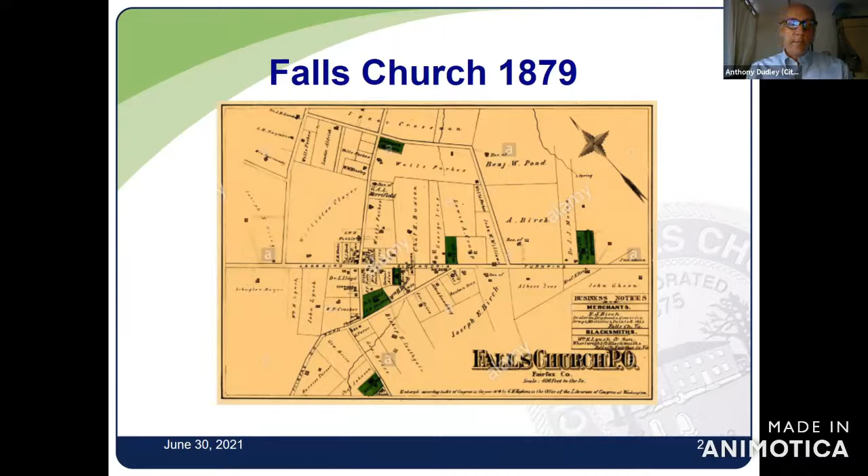As many of you know, I'm pretty new to the city, but I've started to learn a lot about the city, and I'm sure there's lots more. But what I want to talk about tonight is just a little bit of history, and really the main goal is to talk about our 6 priority projects, along with some of our water quality projects. As you guys know, Falls Church has been busy since its inception. The place was run over by a civil war. It developed pretty early in life. In the 1800s, it was a bustling area, and it's continued to be that way.

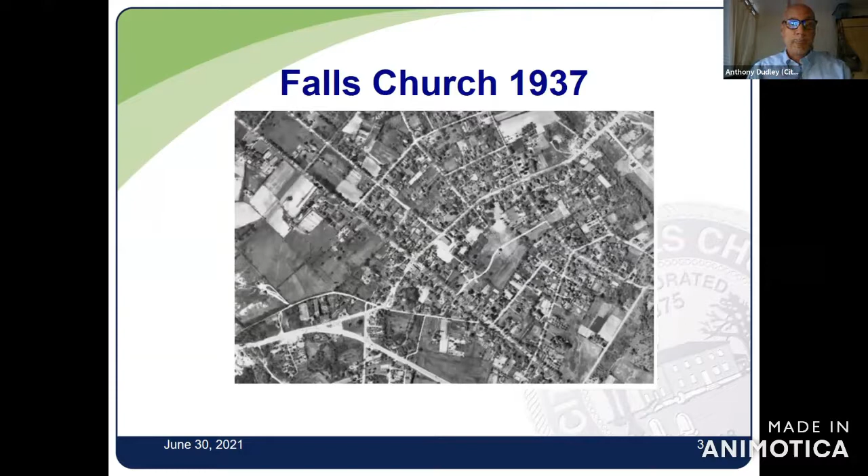This is Falls Church in 1937. You can see the heavy urban development that occurred, and we've come to have to deal with that in this time that we're in now. This is just a short diagram of the map of Falls Church along with the city boundary. It's that purple line there in the middle, divides Four Mile Run from Tripps Run.

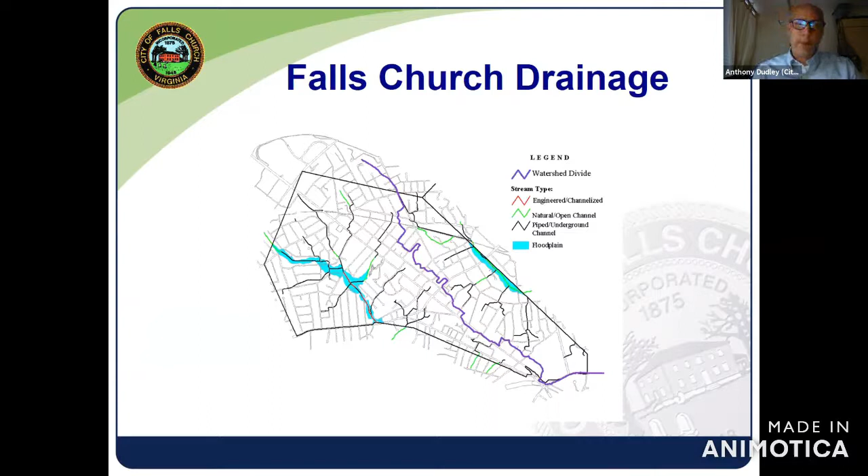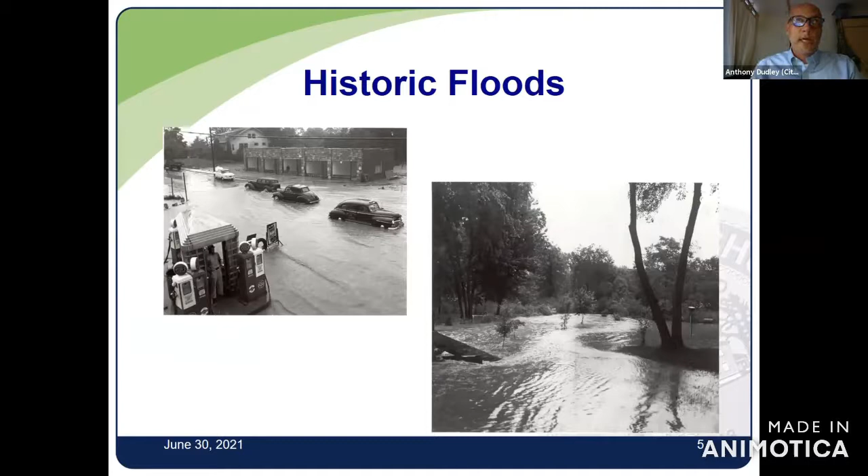What you see in the black are pipes. We have a lot of pipes in the city, and only a few channels. We had historic floods in the past, and this got people moving in the 50s to improve the storm drainage. So the response pretty much to that was to put in a lot of underground piping. As far as stormwater, we can pat ourselves on the backs that we didn't follow communities like Alexandria or Washington, DC with combined sewer.

As old as the city is, it would not have surprised anyone if that would have been the case, but they didn't. It was a separate sewer system, or at least it over time developed into a separate stormwater sewer system. So this is what we did back from 56 to 80. And you see the type of pipe that we have there. That's what they call corrugated metal pipe. It was very popular in this time frame to put in. It was cheap to manufacture, to deliver, and to install.

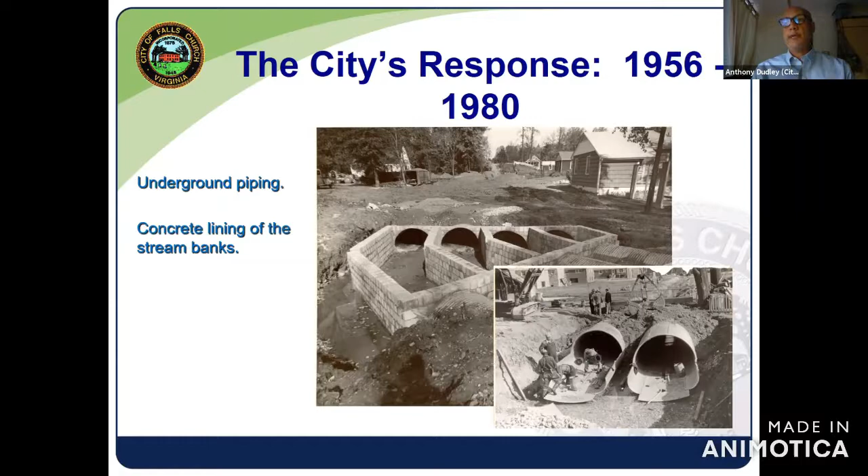But the problems that we garner from that is this. You can see we have a lot of corrugated metal pipe that has the bottom eaten out of, as the picture on the left shows. We have maintenance issues that we have to deal with, as the picture on the right shows.

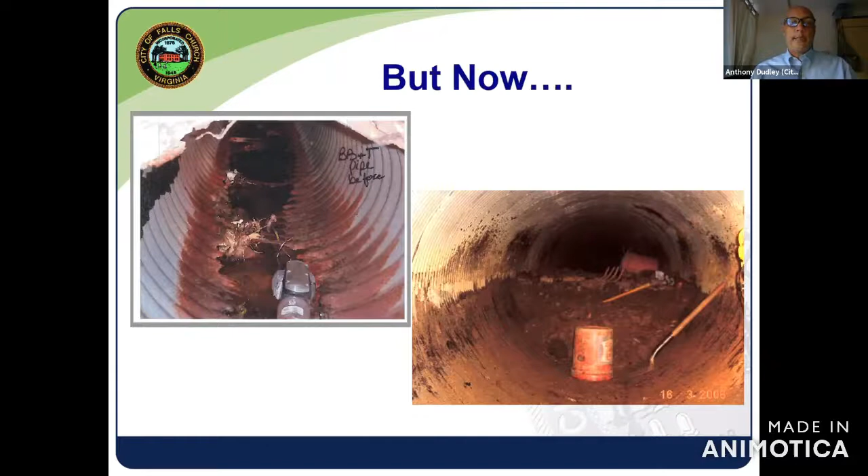And then in 2019, flooding reared its ugly head. The storm that came through in July of 2019 was registered, for the length of the storm that happened, to be about a 200-year storm event. So it was very unlikely that we would have any kind of stormwater infrastructure that could handle that type of storm event. But it did bring awareness to the stormwater infrastructure once again.

It led to the creation of a stormwater task force, which I'm going to let Dave talk about after me. And it also led to the development of 6 priority projects around town, as well as the development of some green infrastructure projects. And so I'm going to take some time to talk about each one of those projects. I won't bore you with all of the nitty gritty, but just give you an awareness of what the problem was, and then a very quick review of how we may solve it and the schedule.

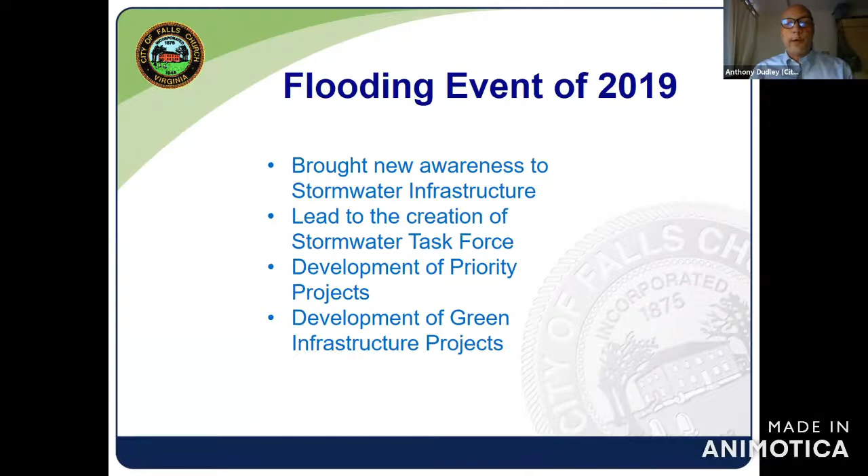So first up is West Columbia Trammell Branch. This is a project we've had going for some time. We just finished installing some pipe across the W&OD canal, railroad bed or trail. And we are going to finish that up with another phase that takes that flow.

Can you guys see my mouse? Yes. Okay, great.

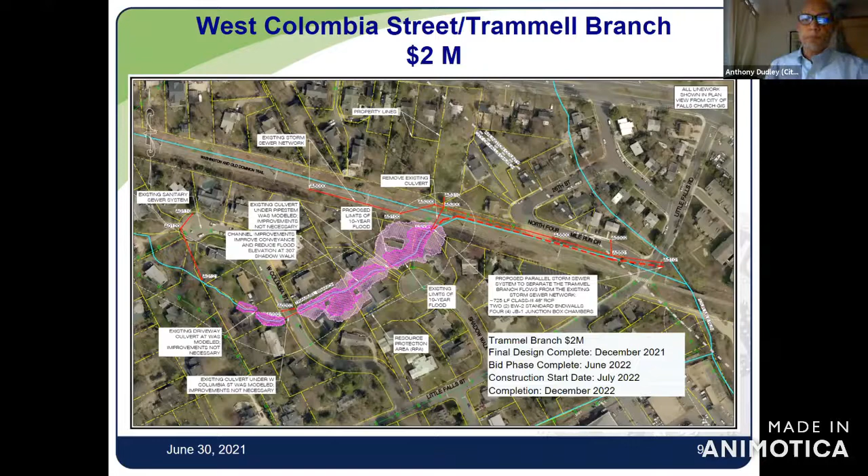And we plan on solving this problem by, again, increasing the pipe size of a pipe that is in poor need of replacement. It's corrugated metal. It has quite a few trees and things growing on top of it that have deformed it the entire way. It's almost like a squished pancake. And it really has taken up a lot of the capacity that the pipe had. So we're going to have to replace that, and that's the biggest part, with some downstream channel improvements. We're looking at a completion date of December of 2022 on that particular project at a cost of about, again, $2 million.

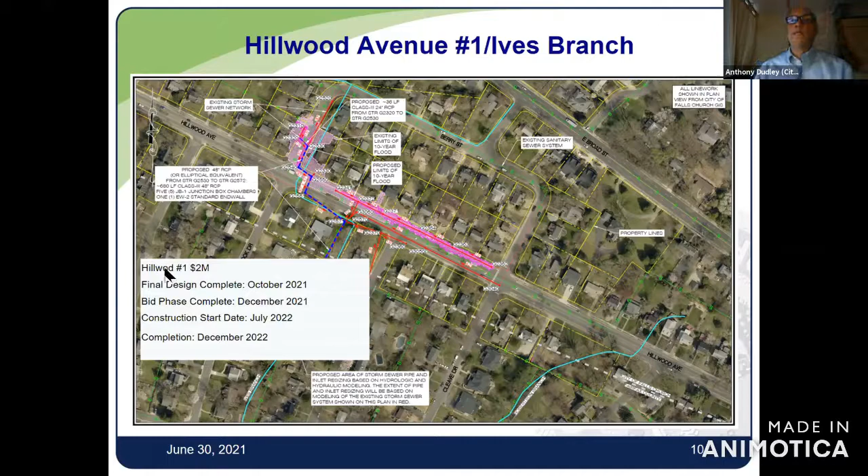We should be able to do that. And that's not going to be a tough project. It's all in the right of way. We're looking at a completion date on that of September of 2022. I'm sorry, the cost on that is about $830,000.

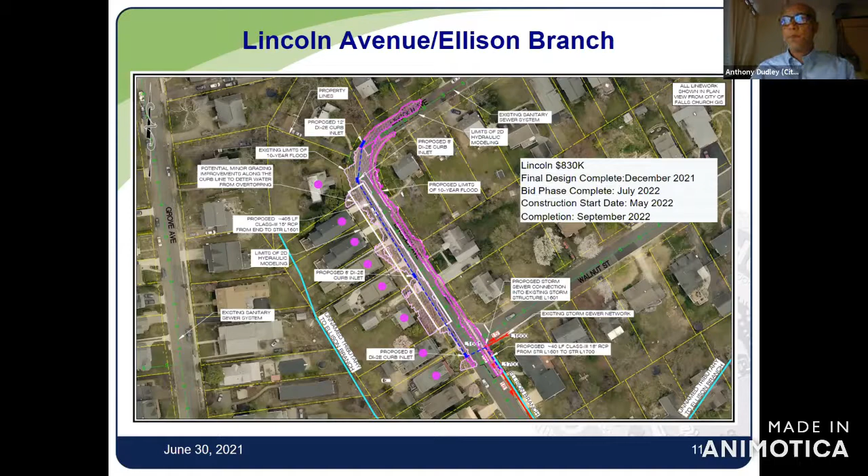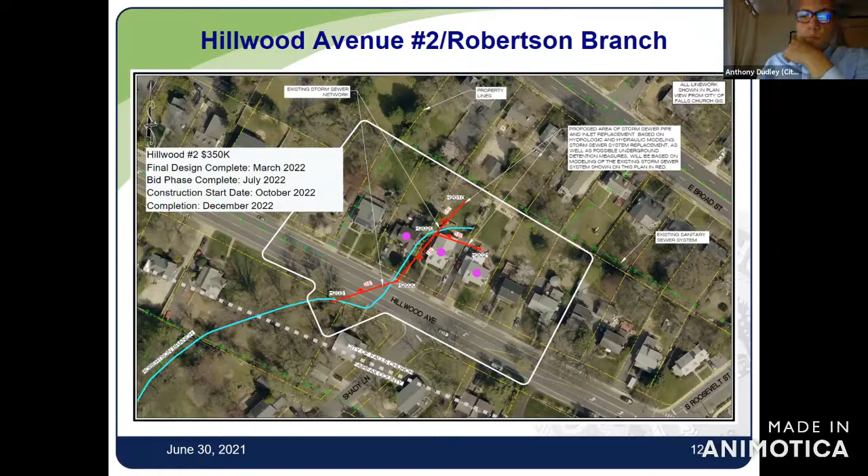So that means, again, we're working with corrugated metal in this area. And so that would mean a possible total replacement of that pipe through the reach right through here. About $750,000 for that project. And we'll see how the property owners want to handle the issues that they have.

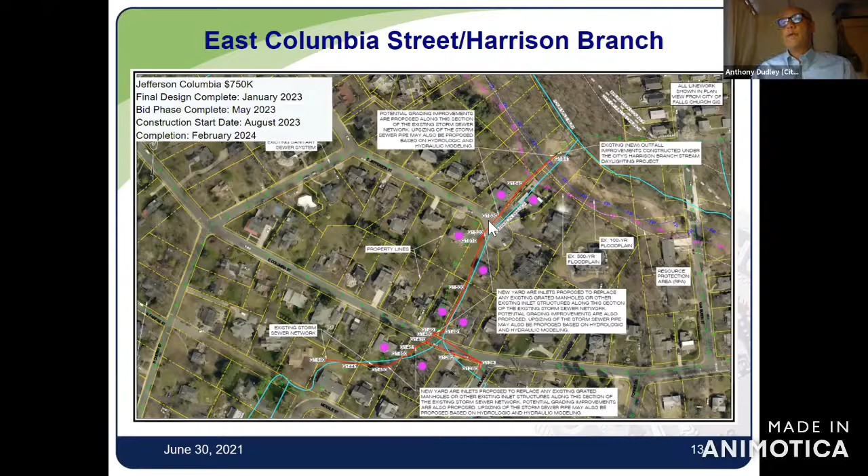There are some other options that we're looking at. The conceptual design was completed, but I think we have a few more options that we really want to check out. Our final design is not going to be complete until January 2023 on that particular project. So those are what I call the 6 priority projects. And we are working on them feverishly, excuse my fat tongue here.

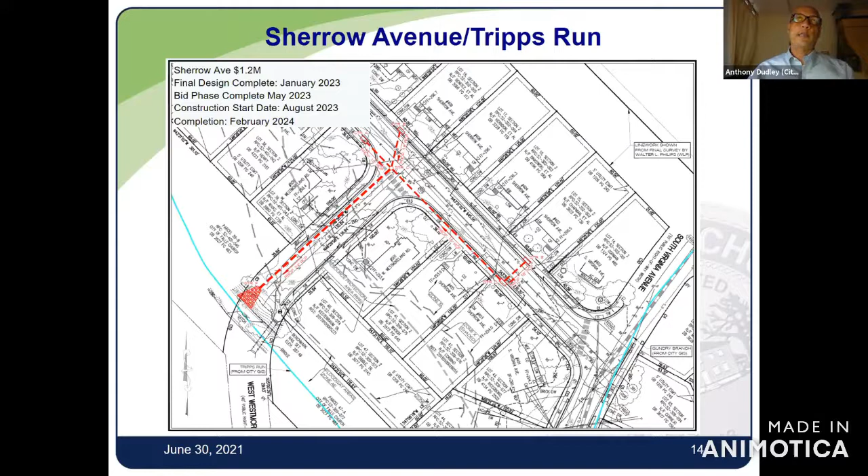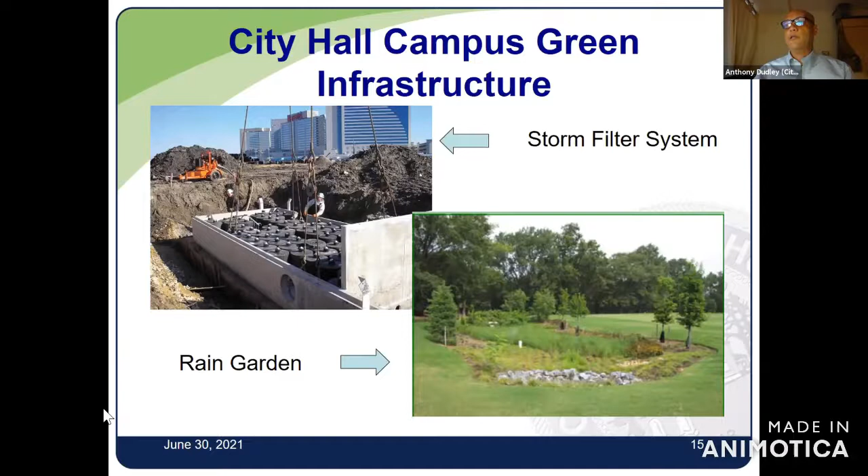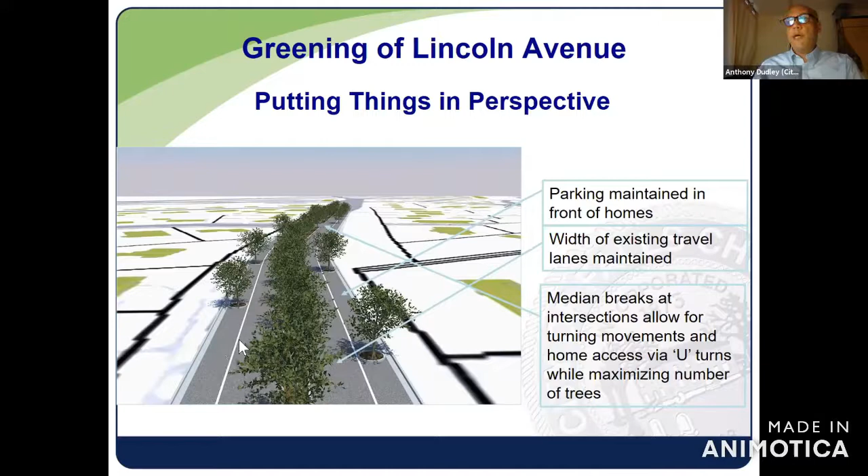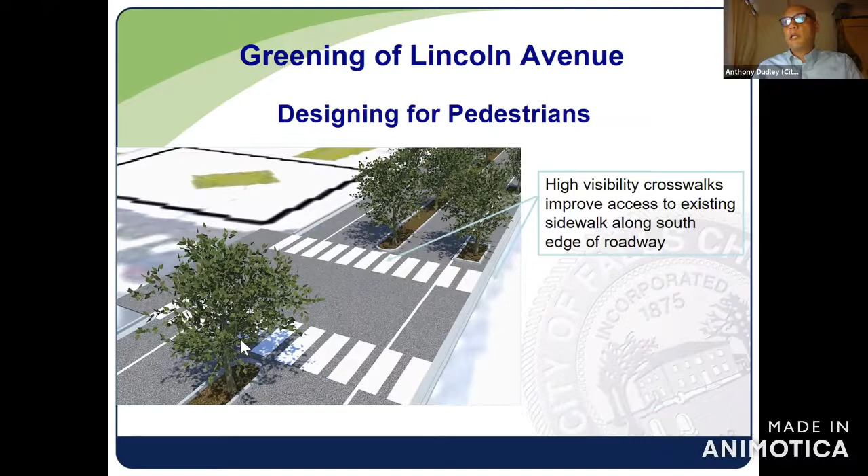Just to give you a perspective on what it would look like, you have some tree planters over on the sides there, as well as a median strip that would run from the city limits all the way up to Great Falls, because that's where we have the most room to do that. We'd also be looking at putting in high-vis crosswalks at several locations across the road. And from a stormwater standpoint, we would look to utilize things such as sidewalk rain gardens to help drain some of the water off the street.

That would also help alleviate some of the flooding that we have in the area, as well as underground detention at least 2 locations, maybe 3, to help reduce the amount of discharge downstream into areas like the pipe on the W&OD trail, which would then also help Trammell Branch out. If that project is approved, it would be a FY23, FY24 project.

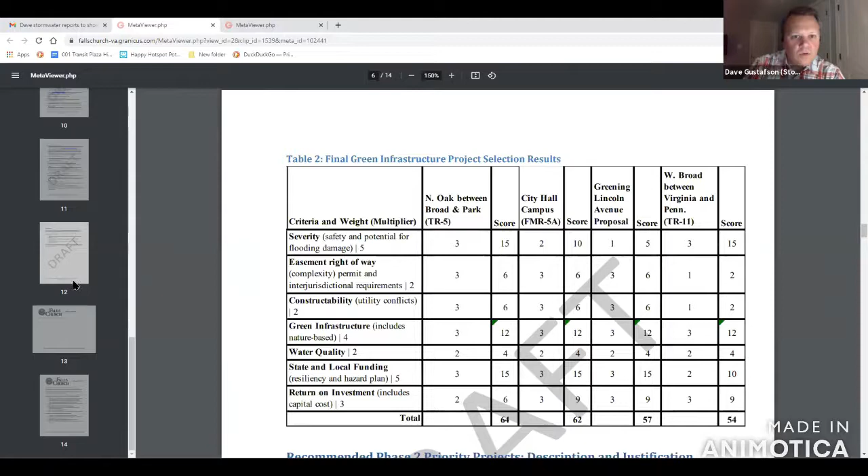Keith, if you get a chance, could you pull up the 2020 task force report, and then go to page 9 of 40. It's page 6 of the PDF. Oh, let's see. It's the other tab. Sorry. Yeah, that's the one. Yeah, if you could go to page 9 of 40 there, please.

So for anyone who really wants to get into the details about stormwater and sanitary issues, I'd encourage you to look at the Stormwater Task Force's page on the city's website.

Go up to page 9, please. 9 of 40.

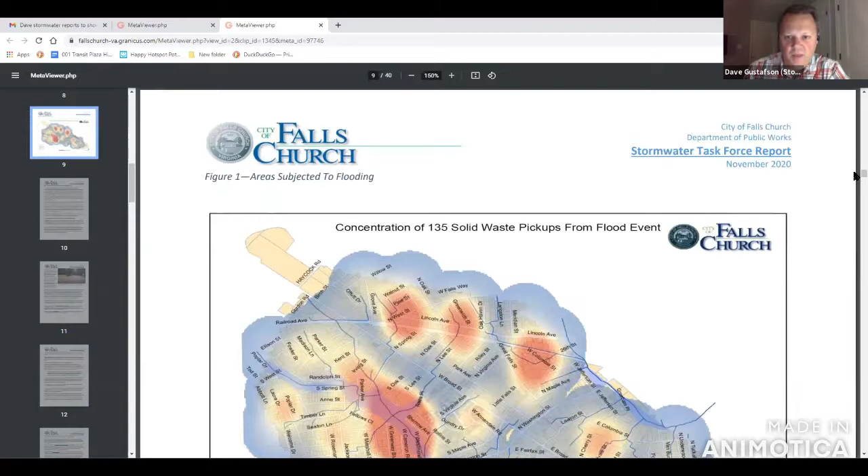There you go. So that shows the heat map that the city produced of the solid waste pickups from the July 2019 flood. So you'll see hotspots along Tripps Run, along Lincoln Avenue, Trammell Branch, Hillwood, a lot of the places that Tony talked about earlier. So this is sort of what led to the creation of the 6 priority projects.

The Stormwater Task Force then worked on those last year to prioritize those, and add a lot of other recommendations for City Council to adopt in the near term and the short term. City Council had the Stormwater Task Force back for a second round this year. Everything was done virtually, obviously, and Council had asked us to take more of a look at green infrastructure recommendations, and also recommendations for how to structure a standing board, not just an ad hoc committee, to look at stormwater issues going forward, because as we know with the flood watch tonight, these issues are not going away.

Climate change is only making the issues more of a challenge more often, and our increasing population and our aging infrastructure are certainly adding to the challenge. But much to Council's credit, to DPW's credit, last year Council approved $400,000 to continue engineering on the 6 priority projects. They approved funding for 2 stormwater engineers, the first of whom is Tony, and we're very lucky to have him on board. They're going to be bringing on another project manager as well.

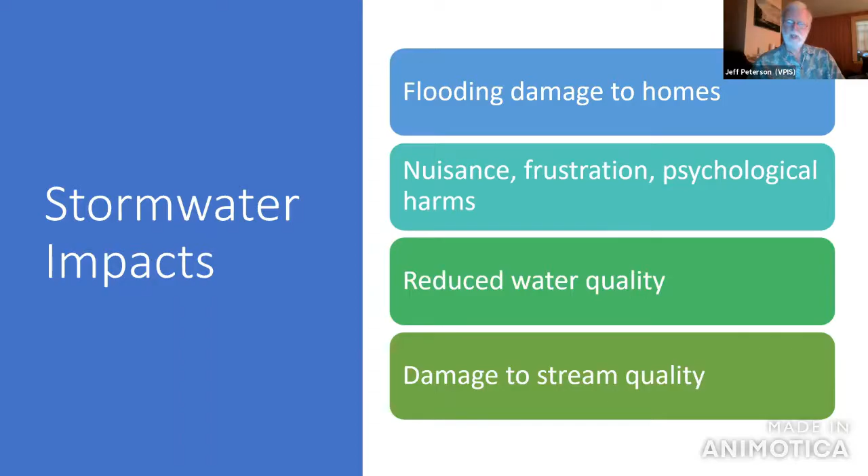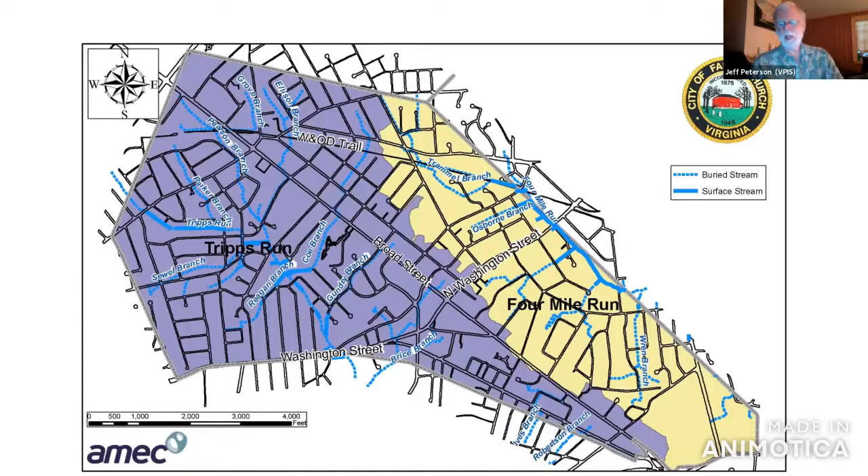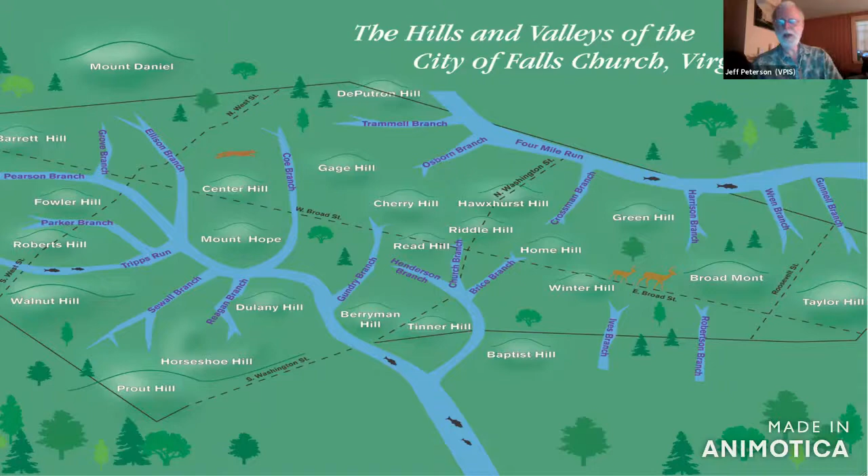Here's a slightly different look at the streams in Falls Church, more of a graphic perspective that shows a little more of the hills and valleys and how the streams work within them. And it shows really, if we hadn't covered over all the streams, the many waterways that we would have around town that have just disappeared.

So as we look forward, going ahead in Falls Church, we have two key ideas to consider as we think about stormwater. One is that the city's developing rapidly. 45% of the current surface area of the city is now impervious, so that water is running off the impervious surface into storm drains. And the population is growing quite rapidly. The population is expected to be around 20,000 in 2045 compared to 2015 when it was just 13,000.

And the RainSmart program really is one small part of a much bigger city effort to deal with stormwater. Tony gave a great summary of the work the city's doing to deal with the much needed restoration of the underground pipes in the city. The RainSmart program has a slightly different goal. It's intended to help rainwater soak into the ground on site and to help prevent flooding and protect the quality of local streams and in the wider Chesapeake Bay watershed.

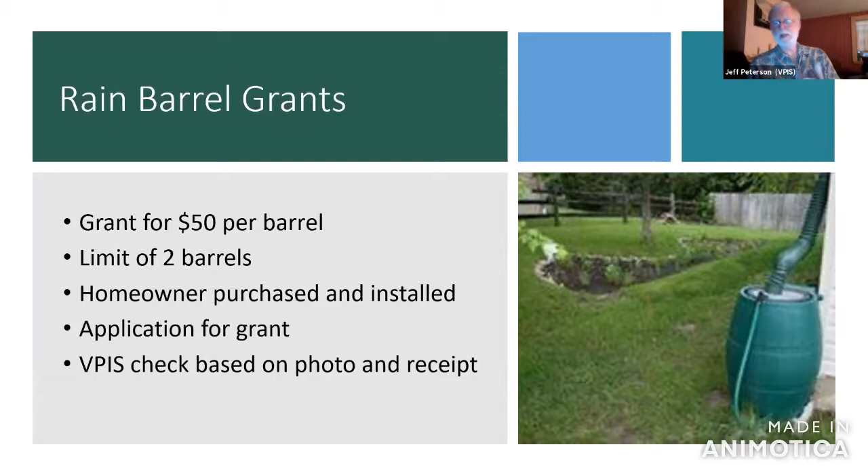So the rain barrel part of the program is pretty simple. It's a grant of $50 toward a rain barrel. You can get up to 2 rain barrels. The homeowner purchases and installs the rain barrels themselves. They submit an application to VPIS. We approve the application, and then the homeowner installs the rain barrel, takes a picture, and sends us a photo and the receipt. That's all there is to it.

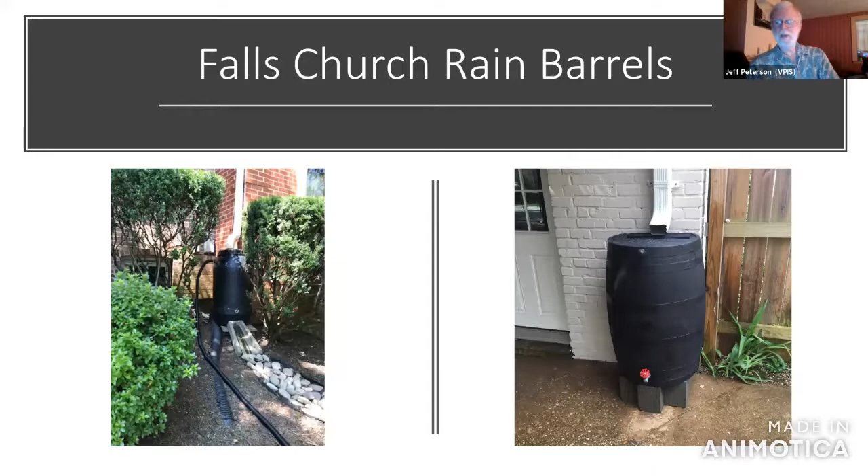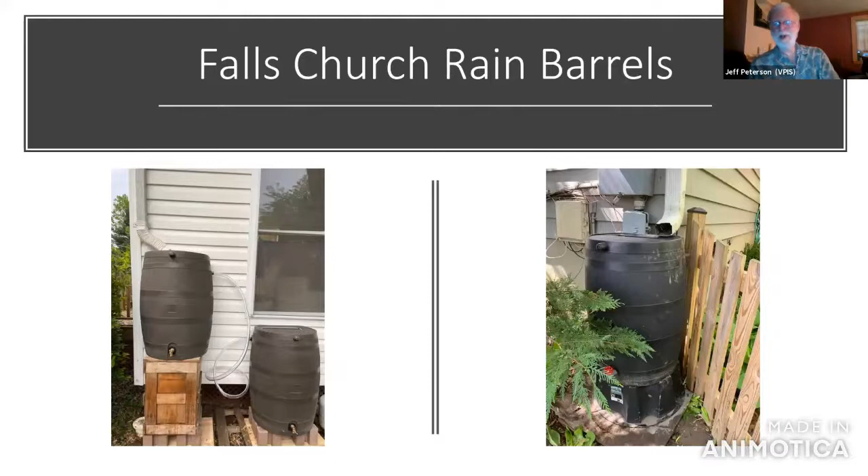And then there's the rain garden aspect of the program, and this is grants for rain gardens, which are part of your landscape designed to soak up rainwater. Also, we have grants for conservation landscapes that are like rain gardens, but not quite so highly engineered. The grants pay up to 50% of the cost of a project, but not more than $1,500 per project.

And basically, this is pretty simple too. You submit an application to VPIS. We have a group of people that take a look at it. If it looks good, we send it to the city and the city approves it. Then the homeowner goes ahead and gets the design and the installation done. We do require that you use a certified landscaper that's been trained to do this kind of work.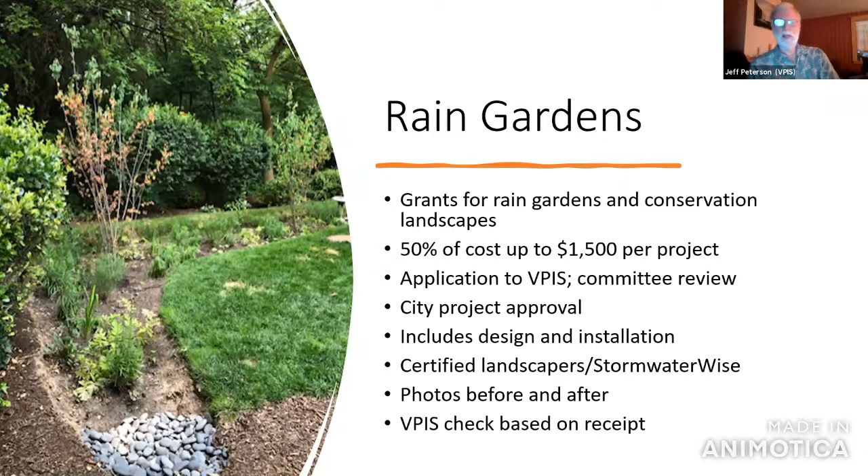Send us photos from before and after and the receipt, and we send you a check for the appropriate amount of money. And so we've had some pretty good experiences. This is an example in the photo of one of the rain gardens installed. Here's a couple more photos of other projects.

So finally, just to wrap up, we do see some new opportunities for the program. We'd like to do more with education and outreach. We'd like to consider expanding funding for rain gardens. I think we've learned that rain gardens are costly. The $1,500 grant helps people move in that direction, but we think we could get more projects if we were to raise that amount, that cap by a little bit.

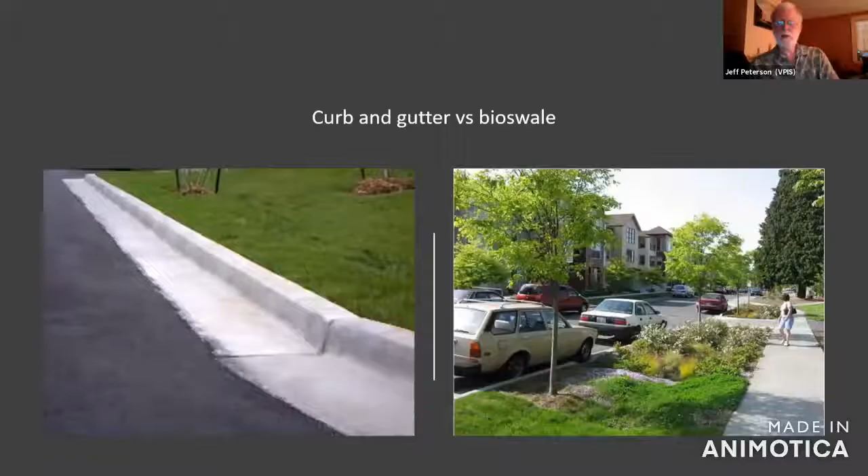We'd also like to encourage bigger projects, like through projects at churches or businesses and perhaps in parking lots. And we'd like to see the city continue to support rain gardens in parks and schools and on other public land. And finally, we would like to see the city, as Tony mentioned at the close of his presentation, take a hard look at the design of new streets and really do as much as possible to install green infrastructure up front. And here's an example of the way we can anticipate in the future having greener streets.

We've relied for years and years on the old curb and gutter model, in which stormwater coming off our city streets is just channeled directly down to the storm drains and into the streams where it generates high flow and flooding. But we're seeing in many places around the country and in Virginia and Northern Virginia, the expanded use of bioswales, such as on the right, where the rainwater coming off the streets doesn't go straight into the sewer system, but it's filtered through bioswales and rain gardens associated with the streets.

Thank you, Jeff. We appreciate it. That was very interesting. I'm going to just toss in a couple of questions to kick off the Q&A session, and then I'll ask Keith to pick up the questions from the audience.